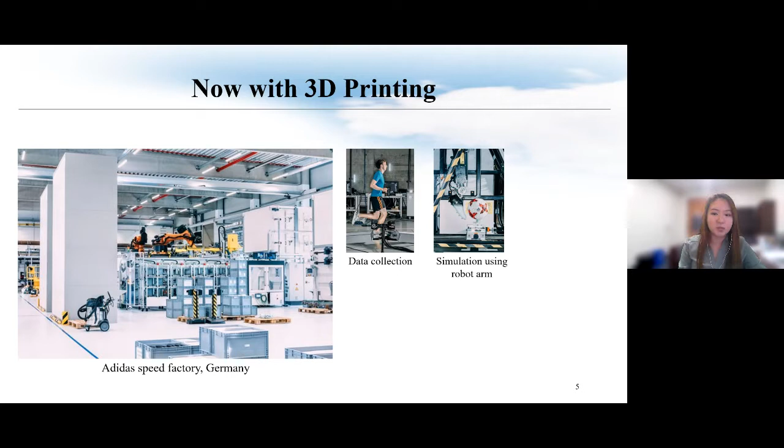For example, if you are a professional soccer player, they can use a robot arm to simulate the movement of kicking a soccer ball and see if the shoes can take the kick but also protect your foot. They can also run simulations in different environments, cold or hot, to customize shoes and shoe insoles.

I know for a fact that Adidas subcontracts their shoe insole orders to some small 3D printing companies like Carbon 3D. They also offer machine knitting and manual knitting to make sure you can achieve the functionality you're looking for, and also the shoes look nice.

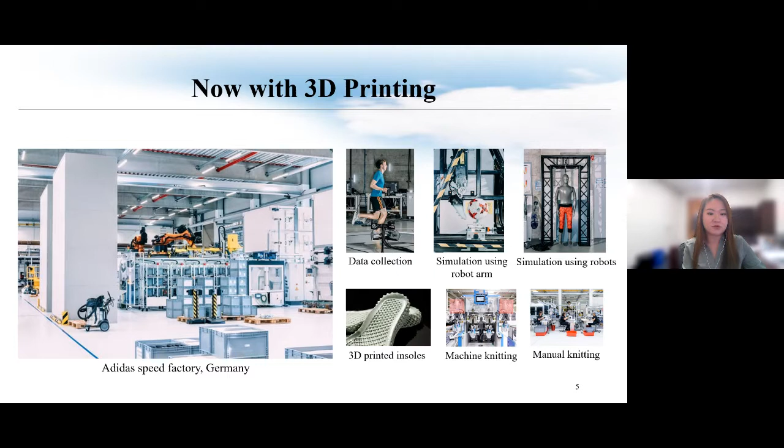So with 3D printing providing a high level of customization, we now have an entirely new option for buying a pair of shoes. Now the next question is, how do we build a house?

I actually just bought my first house a couple months ago. It's a new construction, well, it's still dirt, they haven't started anything yet. I wouldn't say I'm an expert, but I've been starting to get to know a little bit more about building a house.

So traditionally, to build a house, you need to buy the land, and then get all the electricity and water in. You need to design the floor plan, build the foundation, framing, all the major systems, and of course do the interior and exterior finishes. This whole process usually takes a couple months to a year, depending on the availability of raw materials or labor.

So now with 3D printing, how are people building houses? In Mexico, a 2-bedroom new house was 3D printed in about 24 hours, built for low-income residents. And in Italy, a small house was 3D printed in about a couple of days, using mud and waste byproducts.

Now let's look at Texas. This is in Austin, Texas. The local developer and a construction technology company 3D printed this house in a few hours. They used concrete that's designed to cope with extreme weather. This house was for people who were formerly homeless.

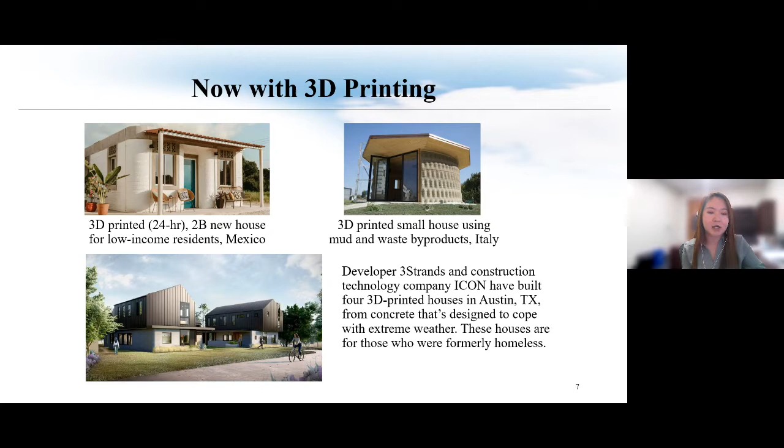Customizing shoes and building houses using 3D printing in a few hours - these are just two examples of how 3D printing is changing our lives. 3D printing, or additive manufacturing, is a process of joining materials layer by layer to make 3D objects, as opposed to traditional subtractive manufacturing.

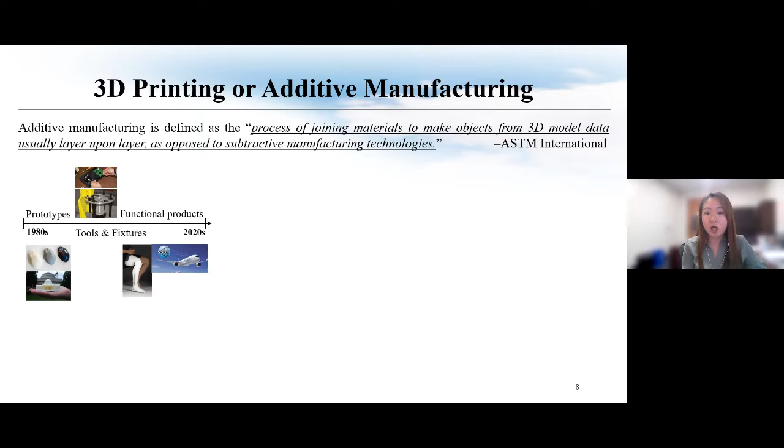3D printing was invented back in the 1980s for making prototypes. Later on, with advancements in new materials, new control algorithms, and new technologies, 3D printing has been used to fabricate tools, fixtures, and now functional products. The global 3D printing market has been rapidly increasing, leading to applications in a wide range of domains, such as aerospace, automobile, and medical devices.

A lot of companies have been expanding their service to 3D printing, like Amazon, Home Depot, and Autodesk. And there are some new 3D printing companies emerging as well, like 3D Systems and Stratasys.

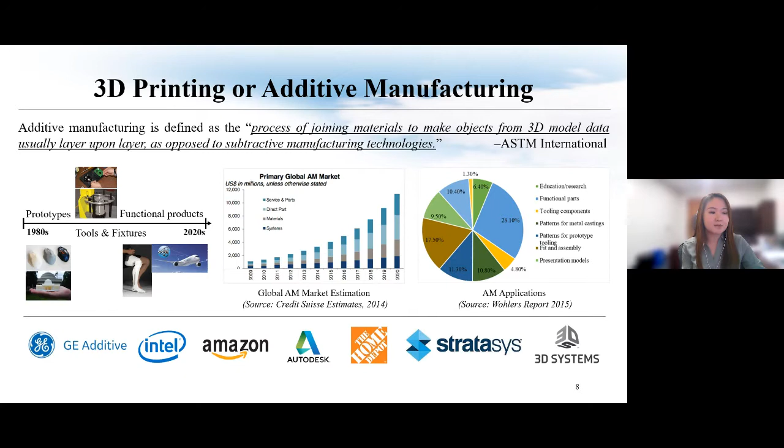At UTA, we have a wide range of different 3D printers. For example, at Dr. Ameri's lab, they have a laser powder bed fusion printer that uses metal powders. At my Sigma lab, we have a selective laser sintering printer that prints nylon, and we have stereolithography that deals with photosensitive liquid resin. We also have a dual nozzle material extrusion printer that prints thermoplastics like ABS or PLA.

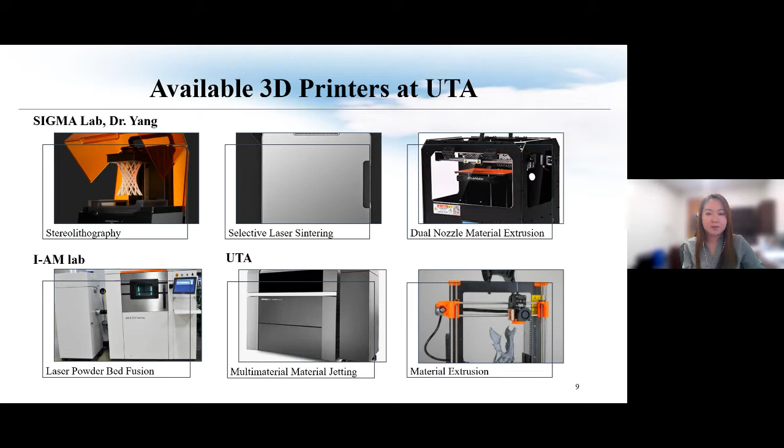Today in this talk, Dr. Ameri and I will be focusing on two research topics. The first will be on smart materials. Dr. Ameri will start by talking about how to fabricate smart materials using an inexpensive approach, and then I'll focus on green manufacturing—we're going to explore if 3D printing is actually environmentally friendly.

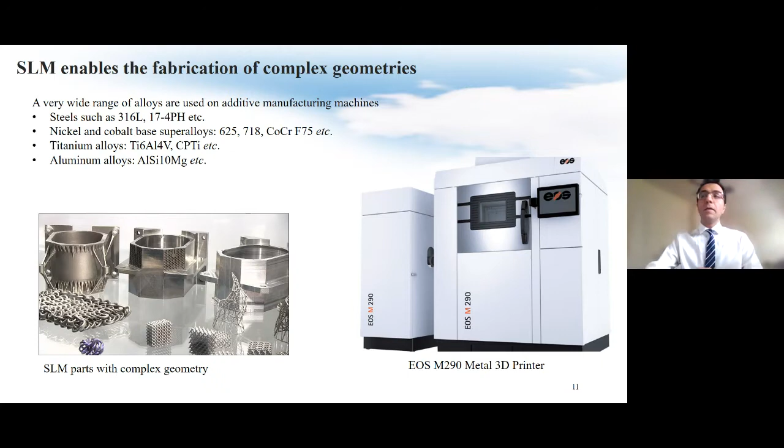Now I want to talk about other materials that are of great interest, but whose process parameters for additive manufacturing haven't been optimized yet for high-end applications. To name a few, these include nickel titanium or nitinol-based shape memory alloys, refractory metals, magnesium-based alloys, and composites.

Before talking about the procedure of process parameter optimization in additive manufacturing for a specific alloy, I'd like to briefly discuss the SLM technique in general. First, an ingot of the desired alloy needs to be gas atomized to produce powder. Then the CAD file of the component is segmented into layers, with appropriate process parameters assigned to each layer. The next step is the SLM fabrication procedure.

During fabrication, a layer of powder alloy is deposited, followed by selective laser melting based on the defined CAD geometry. Once melting and solidification of the layer are done, the building platform drops down by the thickness of the layer. This is repeated until the entire part is fabricated. Finally, the part has to be separated from the base plate either by removing supports or using an EDM cutter.

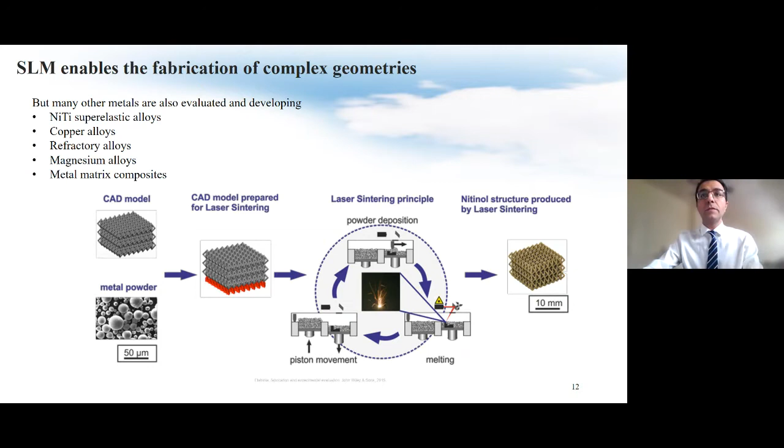One major challenge with optimizing processing parameters for additive manufacturing nitinol is ensuring the material shows superelasticity right after fabrication, without requiring heat treatment or post-processing. Before this work I'm about to discuss, the highest achieved superelasticity in the literature for an as-fabricated part was only 2%.

Very close to the stainless steel.

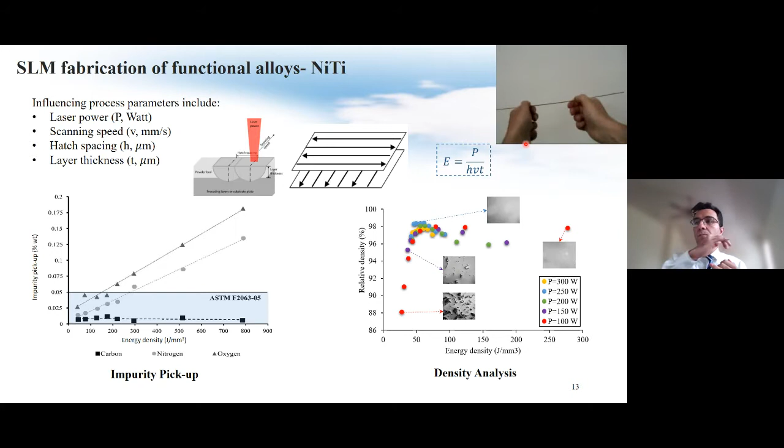Let me talk about the most important parameters in the optimization that have to be tuned during the procedure. For additive manufacturing or SLM, these include laser power, which is the power of the laser; scanning speed, the speed of the laser beam travel during fabrication; hatch spacing, the distance between neighboring laser tracks; and layer thickness.

There is a well-known term that relates these process parameters, called energy input. Energy input is equal to the power divided by the scan speed, hatch space, and layer thickness. The very first step in optimizing process parameters is looking at impurity pickup, density, and surface quality of the fabricated part.

We observe, as you can see here in this graph, higher density with higher energy input, which was desirable, but also higher impurity pickup, which was undesirable.

Per the ASTM standard, we selected a range for the process parameters that met the requirement of high density, allowable impurity pickup based on the rules or standard for biomedical application, and good surface quality—all desirable for biomedical application.

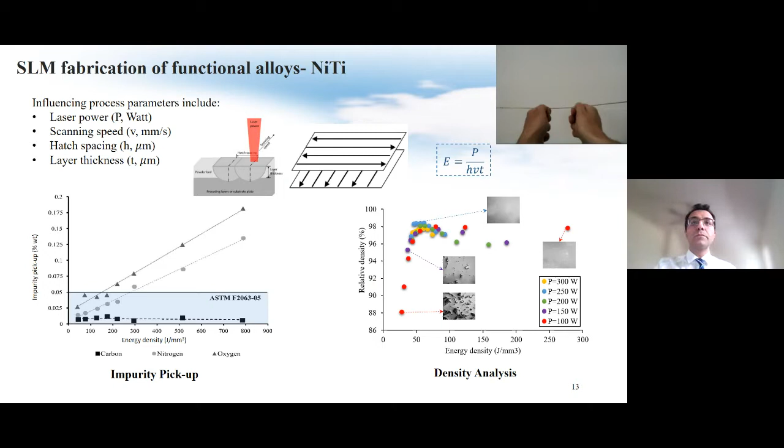The next step was to further narrow down the parameters to ensure the as-fabricated part demonstrates superelasticity. It is well known that superelasticity can be achieved through modification in the microstructure and texture of the fabricated part. In regard to the microstructure, it has to provide epitaxial growth, meaning an appropriate level of remelting between each layer.

As you can see here, if the energy is not enough for the fabrication, the layer would not be connected to the previous layer. On the other hand, if the energy is too much or excessive, there would be overheating, which intensifies residual stresses and causes significant grain growth—both undesirable in general.

In regard to the texture, it is well known that the presence of 001 texture can significantly improve the superelasticity when compared with a polycrystalline structure.

As you can see in this figure, the level of strain recovery is about 5% for single crystal conventional material, while it is only 3% for the same material but in the polycrystalline mode for the conventionally fabricated nickel titanium.

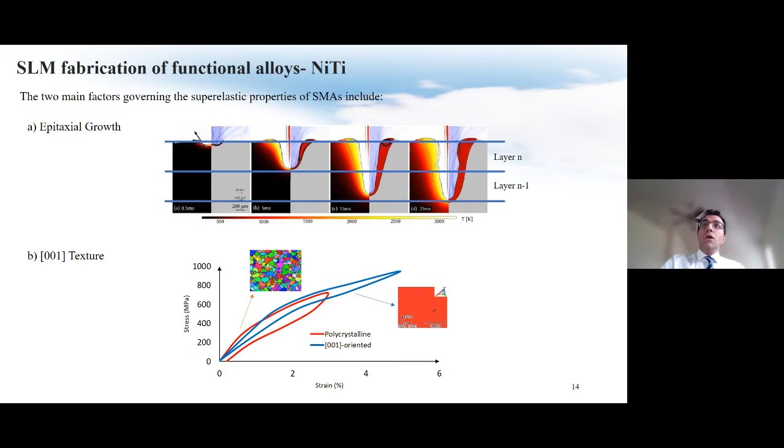Therefore, we performed a design of experiment and tried to achieve a set of parameters that result in epitaxial growth as well as 001 texture.

After SEM and EBSD analysis of all specimens, we were able to obtain a set of parameters that result in epitaxial growth and produce single crystal. The hypothesis here was that such microstructure and texture result in perfect superelasticity. Therefore, the next step was to test this hypothesis.

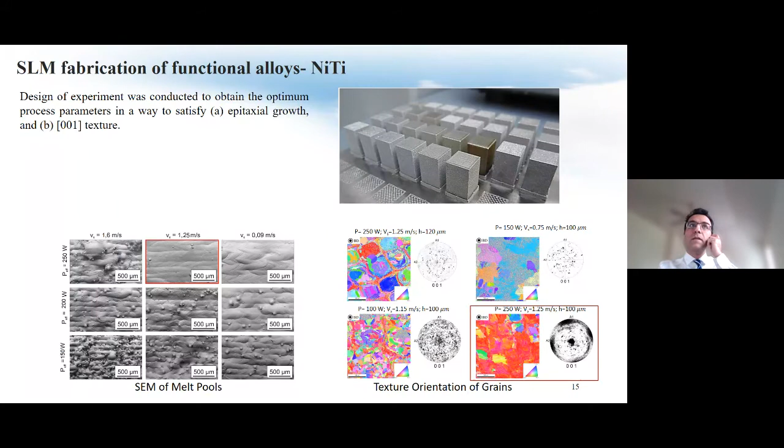During loading and unloading of the part, interestingly, for the first time, 6.5% superelasticity was achieved in this specimen without any kind of post-processing heat treatment.

On the other hand, the as-fabricated SLM NiTi samples in the literature demonstrate almost no superelasticity, and that is why the standard of care is to perform post-processing heat treatment on the as-fabricated samples, to create a desirable level of superelasticity as well as enhance the strength of the material by inducing more Ni-rich precipitate.

Anyway, post-process heat treatment should be avoided as it involves extra time, costs, as well as labor training, and some other associated costs. By the way, even with post-process heat treatment, the highest achieved superelasticity in the literature was only 4.3%, which is absolutely lower than what was seen in our newly optimized specimen.

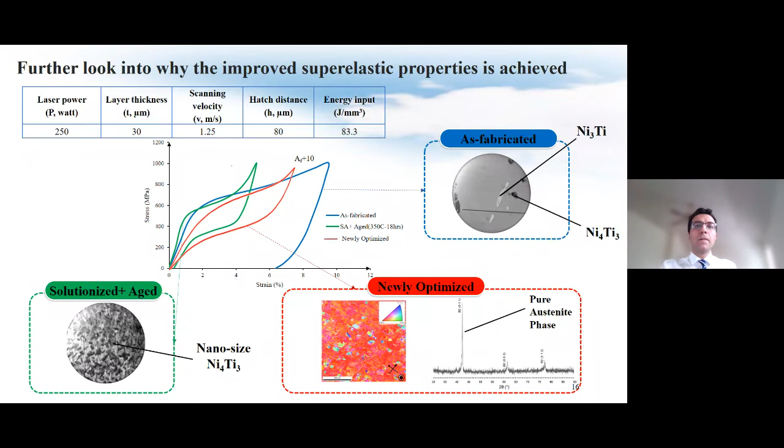I should mention that this major issue or drawback is not only associated with SLM-fabricated nitinol, but also observed in all fabricated specimens with different materials. Therefore, we started to identify the roots for early failure in tensile testing specifically, and provide some solutions to address this issue.

Our first hypothesis was that the layer-based feature of SLM specimens results in such early failure. Therefore, we decided to study the influence of building orientation and scan strategy, with the aim of minimizing the adverse influence of layer-wise fabrication.

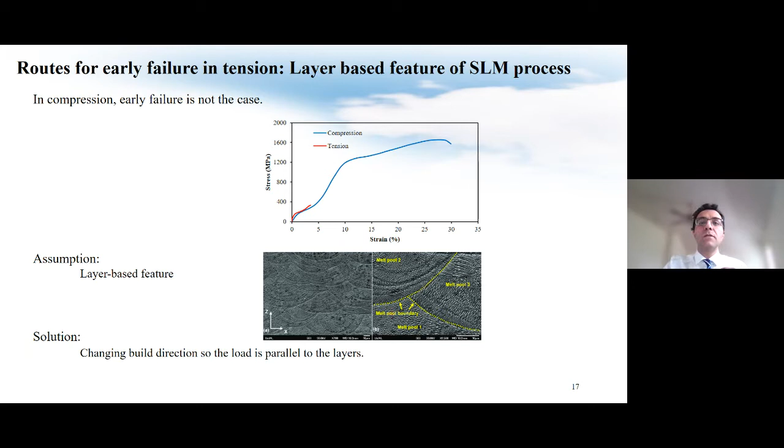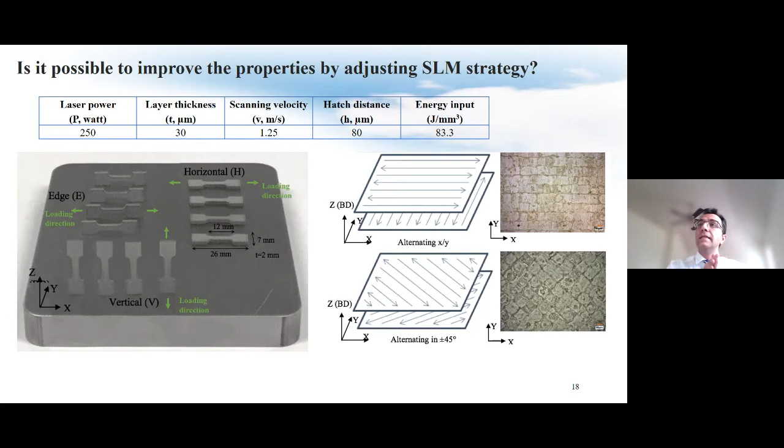As can be seen in this slide, the part processed horizontally with a scan strategy of alternating 0-90 degrees resulted in the highest mechanical strength. By the way, we found that the influence of the building direction, horizontal or vertical, was significantly higher than that of scanning strategy.

For the specimen built vertically, when we look at the SEM image at the failure, we observe that the type of failure was interlayer failure. On the other hand, in the case of the horizontally fabricated specimen, such failure was not observed, and that is why higher strength was observed.

Although relatively higher strength was achieved, there was still room for improvement, and we decided to further investigate the microstructure and find other routes for early failure.

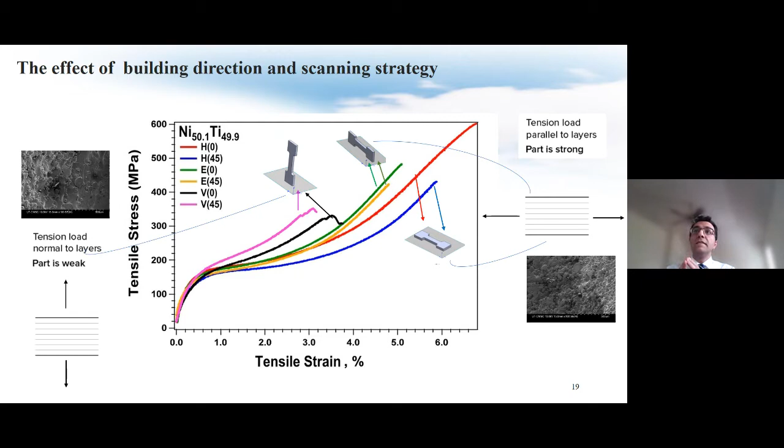Therefore, we decided to do a comprehensive study to evaluate the spatial microstructure properties of the SLM fabricated NiTi specimens. Before this study, all the available works in the literature were limited to local microstructure analysis rather than spatial analysis.

We observe significant variation in the microstructure of the specimen when comparing the area near the surface and the area away from the surface. For example, for the area away from the surface, we observe large epitaxial grain, elongated melt pool, and formation of minor brittle phases as well.

However, when looking into the area near the surface, we observe refined grain, interconnected melt pools, a significant number of brittle precipitates, as well as unmelted powder together with cracks, as you can see here.

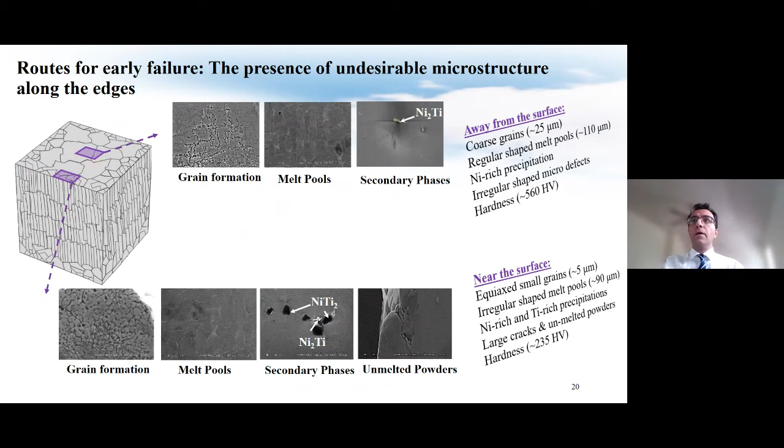Here we perform further analysis on the composition and hardness across the cross-section of specimen 2, and we confirm that brittle precipitates are higher near the surface. Also, as expected, we observe lower hardness value for the area near the surface compared to the middle region.

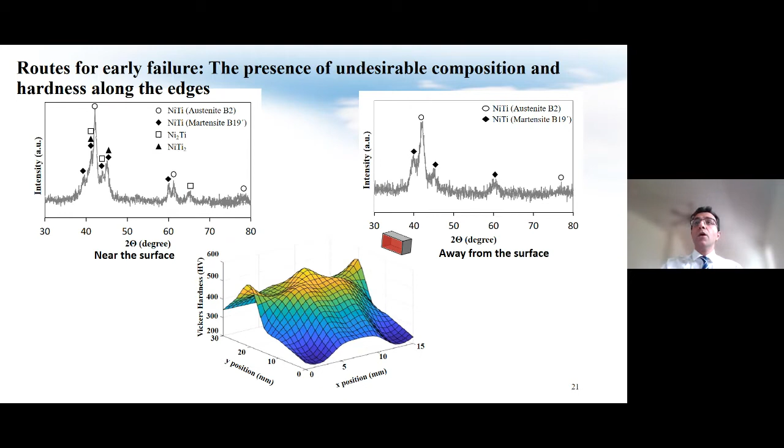Our hypothesis was that the area near the surface undergoes additional convection mode, and that is why the cooling rate at the surface area is higher.

In other words, the input energy delivered to the area near the surface is lower than the middle region, as shown in this picture as well. And that is why we see more cracks, unmelted powder, irregular melt pools, and maybe refined grains.

As a potential solution, we decided to consider a border with an offset from the main part during the fabrication for this study. Our aim was to control the convection heat transfer occurring near the surface area, by considering this border as presented here.

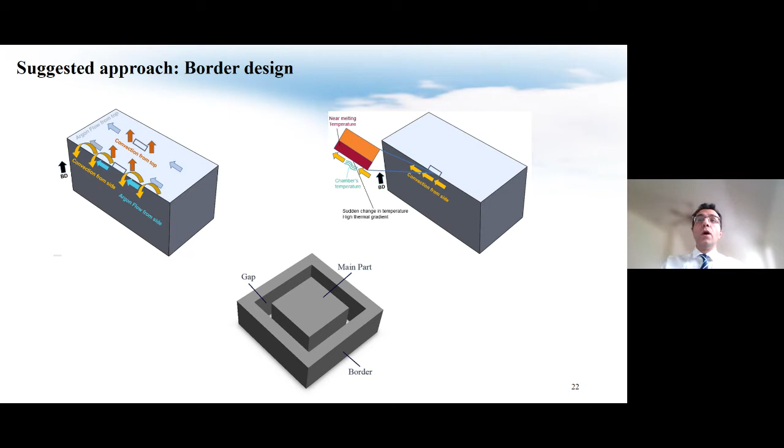Our preliminary results demonstrated that adding a border with a gap of about 0.5 millimeter significantly controlled the microstructure variation in SLM fabricated nitinol parts. For example, the sample processed with a border demonstrated larger, more equiaxed grain and more intense melt pools.

The future direction on this topic is to further optimize the gap between the border and the main parts, and perform mechanical and fatigue tests to obtain the level of improvement in the mechanical strength of as-fabricated superelastic nitinol.

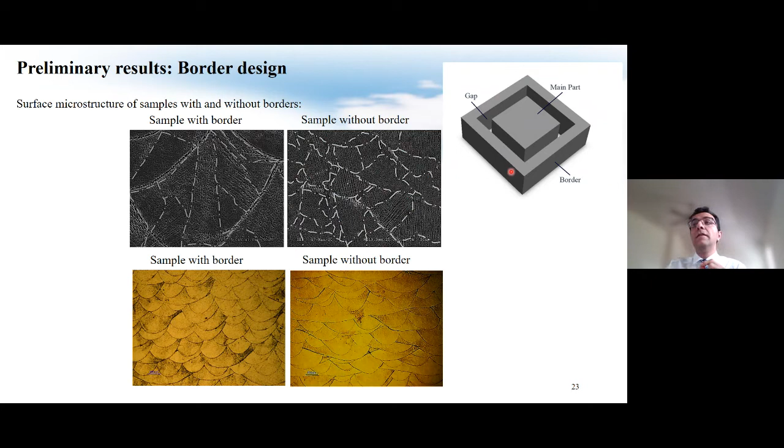The result of this study will definitely open new doors for the design and fabrication of high-strength SLM components, which would revolutionize the field of additive manufacturing of SMA, or shape memory alloys.

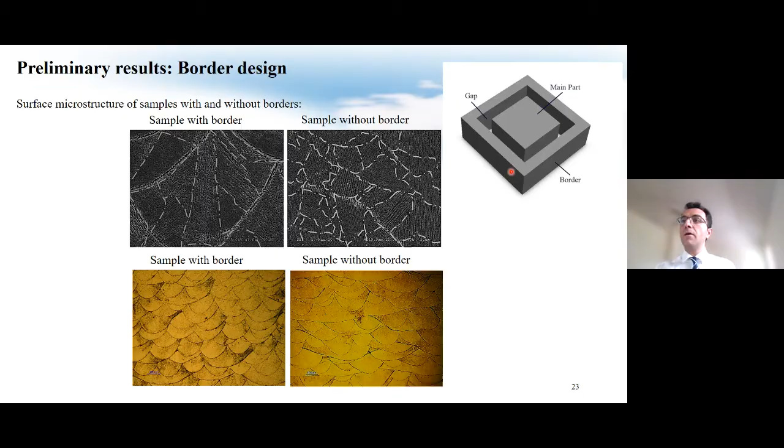Thank you, Dr. Mary. I think shape memory alloys are very interesting. So the second part of this talk, we're going to focus on the sustainability of 3D printing, focusing on environmental, economic, and social aspects of sustainability.

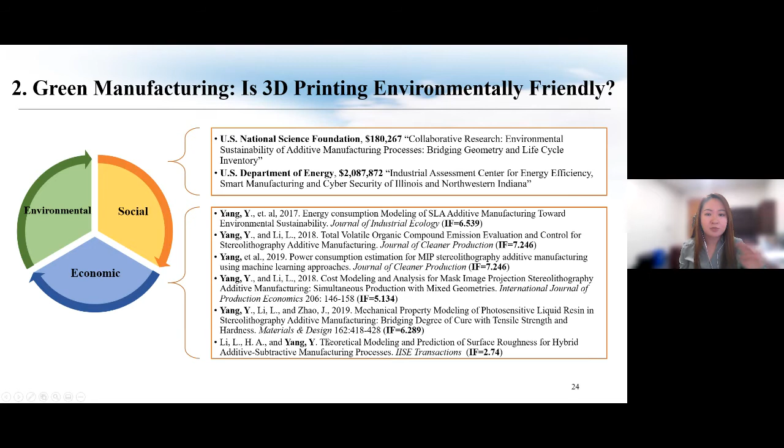This was previously sponsored by the National Science Foundation and the Department of Energy. We published more than 8 journal papers and some conference papers, but today, because of limited time, I will only share with you some part of this project and some interesting results.

So first, let's look at the process we're going to focus on and why. This process is called stereolithography. It's a mouthful. I have been using this terminology for more than 6 years, and I still have trouble pronouncing it. Anyway, let's call it SLA, or some people call it the SL process.

With this process, we deal with photosensitive liquid resin, like the yellow colored liquid there. That's our raw material.

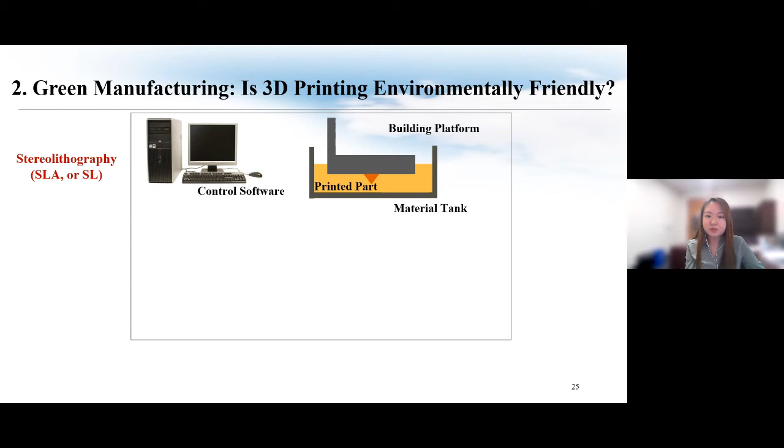So we are going to actually build solid parts from that liquid using this technology. We have a control computer, and we set up the printing by selecting values of some controllable parameters. We send that information to the components of the machine. We use the projector to project the images of each layer to the build platform, and we solidify that layer with UV light. Then we repeat this process layer by layer until we finish the entire production of the part.

So why do we choose this process to evaluate sustainability? Well, first, because it has multiple electricity consumers, and we have some parameters associated with them that we can control. That gives us the opportunity to change the energy consumption.

Second, the raw material we use here, this photosensitive liquid resin, is VOC coated. What that means is, even without 3D printing, that resin can possibly have VOC emissions. VOC stands for volatile organic compound, and that's not good for human health. So it's very important to understand how much VOC emission is caused by 3D printing and what we can do to improve the process to reduce or even eliminate the potential human health risks.

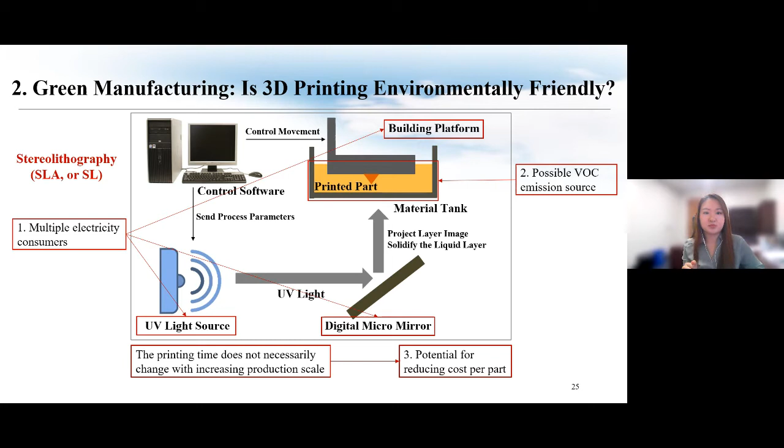Last but not least, one unique thing about this projection-based SLA process is that the printing time does not necessarily change with increasing number of parts. Meaning you might have the same printing time when you print one part versus when you print three of the same parts. So that indicates great potential for reducing cost per part. Basically, that's why we decided to focus on this process for sustainability evaluation and for exploring opportunities to enhance the sustainability of 3D printing.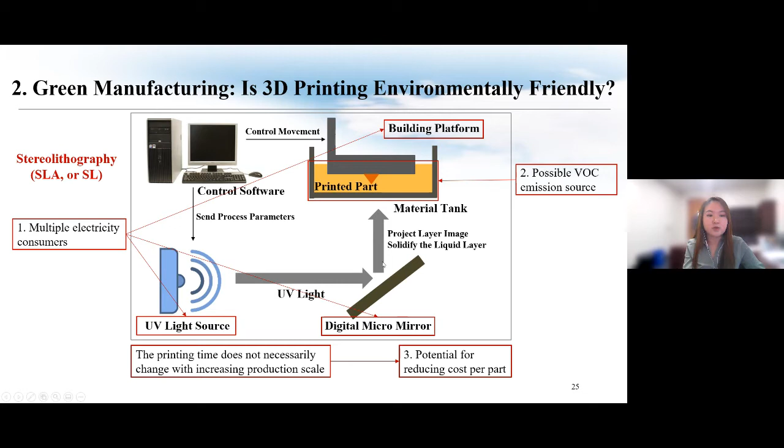So first, we decided to look at energy consumption. This part is very preliminary work. Basically, what we did is build a mathematical model to estimate the energy consumption, and then we validated that model by comparing the calculated results with experimentally measured results. The prediction error of our model turned out to be less than 12%, which is possibly caused by the low level of accuracy of our power meter.

Back then, I used a normal power meter and had to manually write down the readings, so that can cause some inaccuracies. But later on, in another energy consumption study, we actually used a more advanced power meter which has an automatic data logging function, so that actually increased the accuracy.

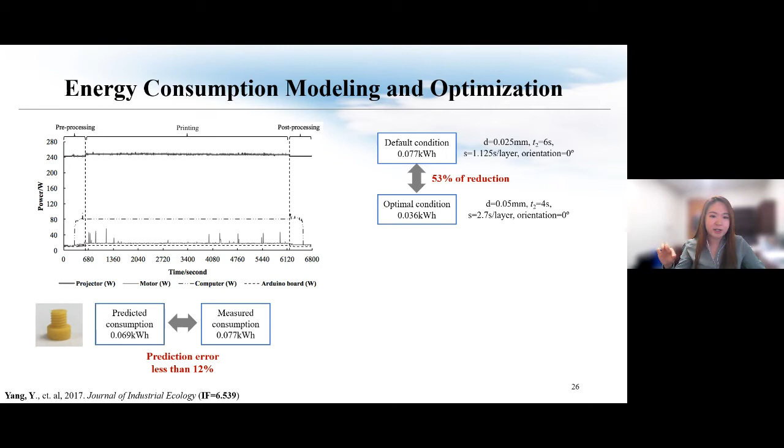Based on this model, we performed optimization, and the result suggests that we can potentially reduce the energy consumption by around 50% by changing the values of these parameters. I mean, this is a no-brainer, because if you change the height of each layer, you change the total printing time, so of course you're going to end up with different energy consumption, right?

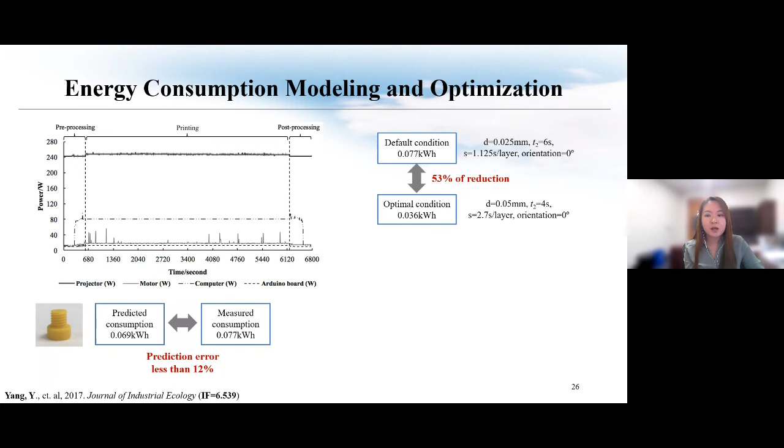But the tricky thing here is how to make sure we still have good fabrication quality, because in my opinion, any attempts to reduce energy, reduce cost, or reduce emission without considering quality is meaningless. So we also looked at the quality of parts fabricated with optimized parameters. We actually found out that using the optimal parameters, we didn't sacrifice the surface quality.

But the thing is, this is purely experimental. We didn't have the capability of actually estimating or predicting the fabrication quality. We were actually able to do that later—I'm going to talk about that in a few minutes. So this is energy consumption.

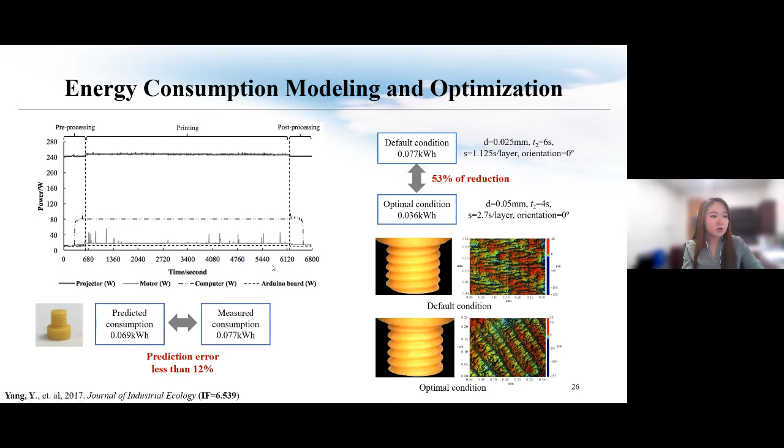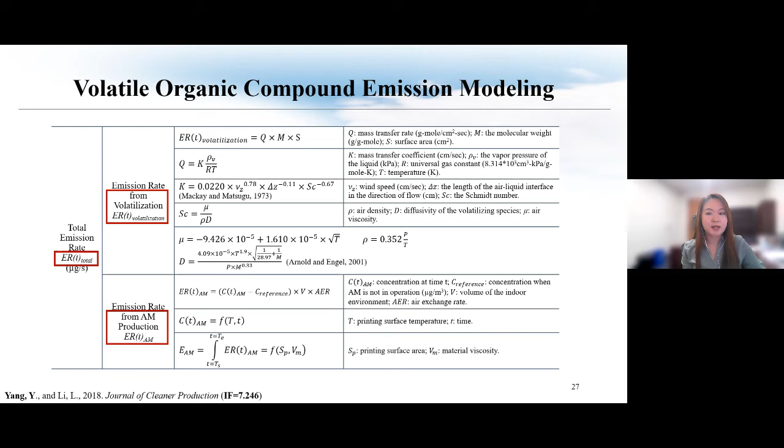Next, we looked at the VOC emission. What we did is build a mathematical model. In this model, we have two emission sources. One is the emission due to volatilization, meaning even when you don't 3D print, just having that raw material sitting in your lab causes VOC to escape. The second part is VOC actually caused by 3D printing—for example, during printing the build platform moves in and out of the material tank, and that disturbance facilitates volatilization. Also, during printing the temperature increases, which can cause additional emission as well.

So we validated this model through experiments using a real-time VOC monitor. We did multiple experiments for different materials and different production scales to validate our model, and the model turned out to have around 14% error.

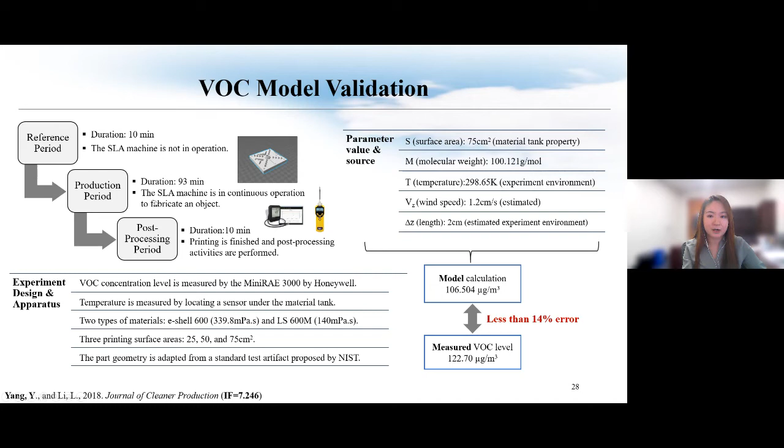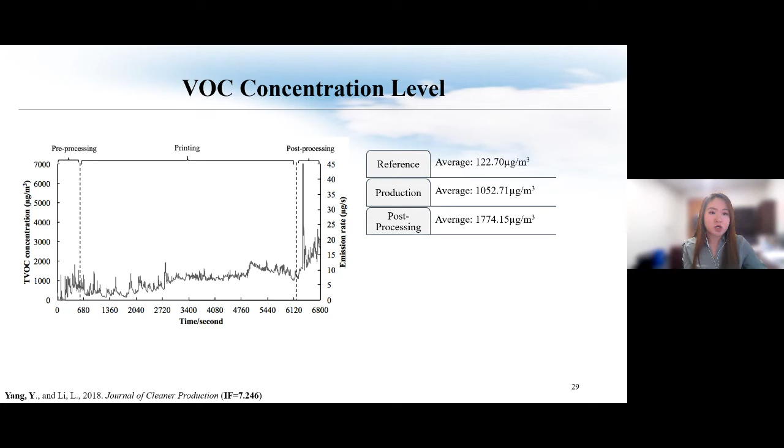So next, we are interested to see if this level of emission will be harmful to people. The reason we are particularly interested in this is because this type of desktop small-sized 3D printer is often used in universities and high schools for educational purposes, and also in hospitals or medical facilities to fabricate small medical devices. Students and patients are all vulnerable groups.

So it's very important to make sure the emissions from these 3D printers will not cause any health concerns. After the evaluation, our results show there are no cancer-related risks, but there are definitely some non-cancer risks like skin irritation and lung problems. So the next step is: what can we do to reduce that emission and make the printer more environmentally friendly?

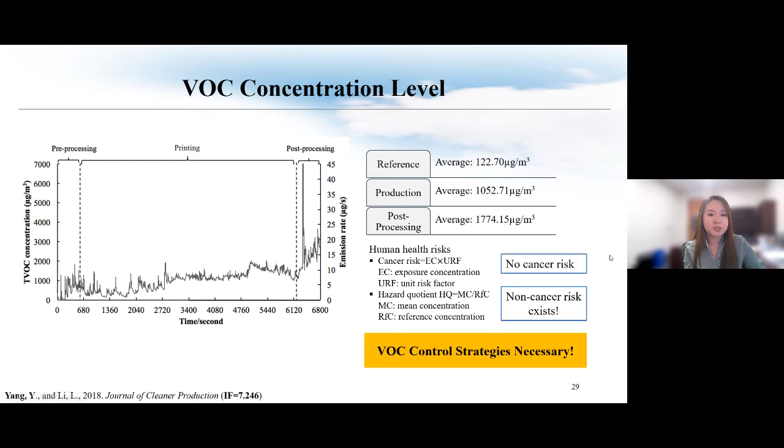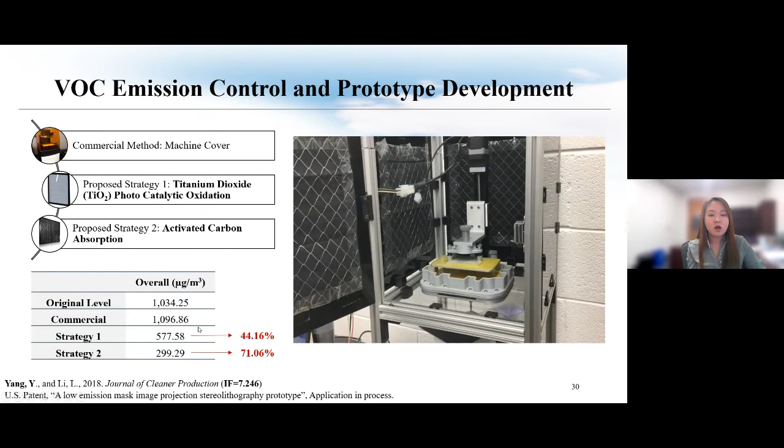The commercial method is just to add a machine cover, which has been proven to be not that effective. So we tested two methods: one is to use titanium dioxide to oxidize the VOCs, and the other is to use activated carbon to absorb the VOCs. Both methods turn out to have the ability to reduce emission levels by a significant amount. We actually built a prototype that used both of these strategies, and also adopted the optimized parameters we selected in the energy consumption study.

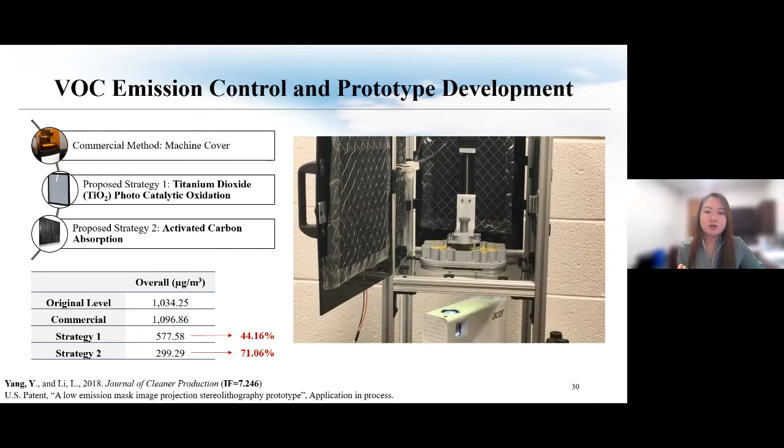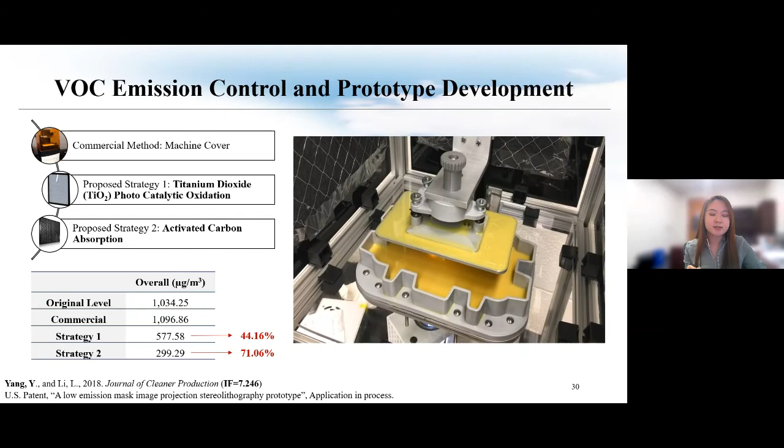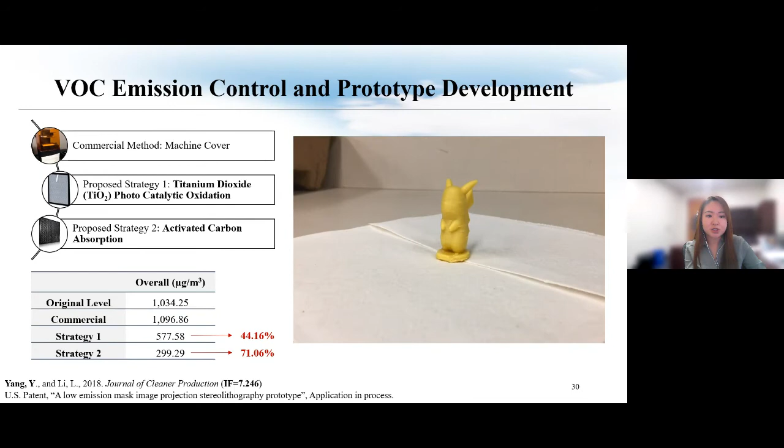Interesting news is that earlier last year, 2020, a company - I remember it's 3D Systems, but I'm not sure - had a new 3D printer. One of the features they mentioned was that the printer was equipped with VOC emission filters. So I definitely see that companies have been starting to care more about the potential emissions from 3D printers and what they can do to make them more environmentally friendly.

So that's energy consumption and process emission. Next, I would like to focus on how to reduce the cost per part.

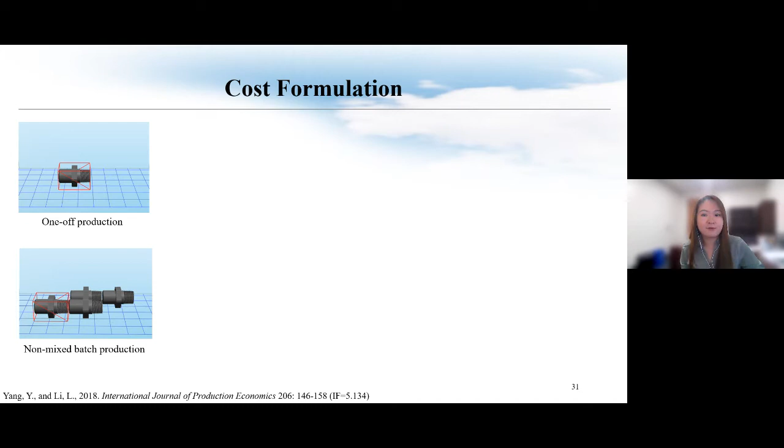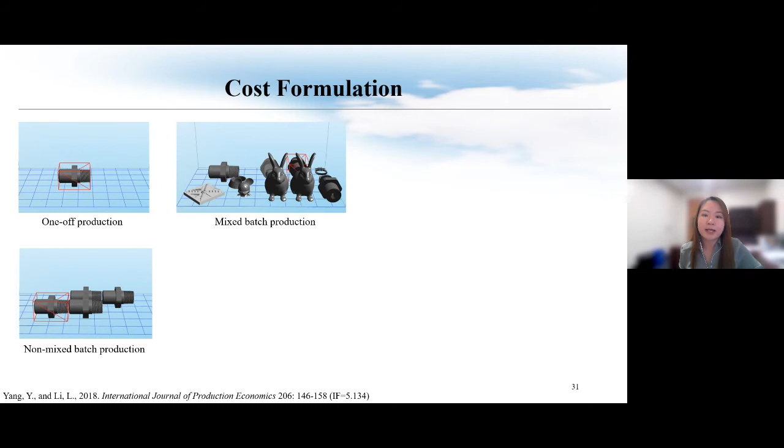Usually we have three different layouts for production: one-off production, where we just print one part each time; non-mixed production, where we have multiple parts but they all have the same geometry; and mixed production, where we have multiple parts with different geometries. Traditionally in literature, most people focus on one-off production or non-mixed batch production because it's easier to calculate their cost. So what we did here is build a cost model capable of quantifying cost for all three different layouts, and based on that, we formulated an optimization problem.

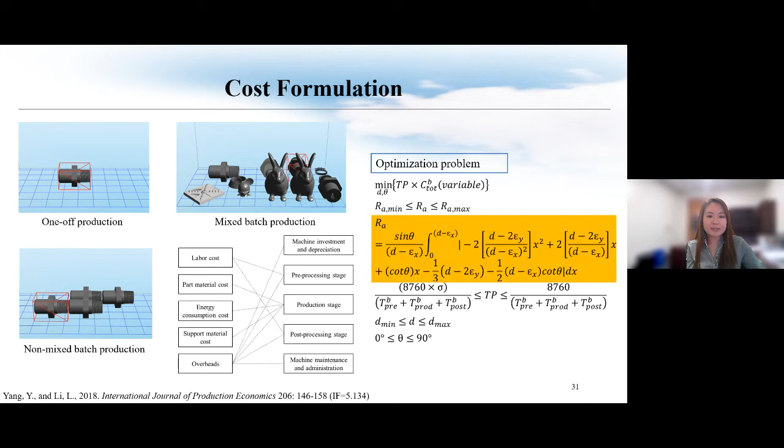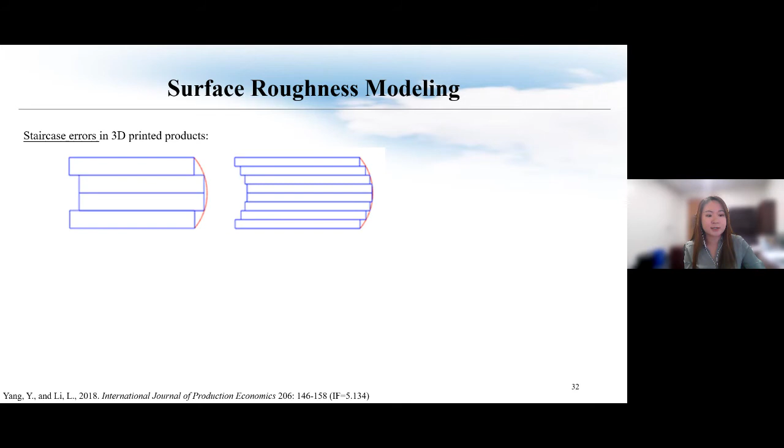We had to do a separate study focusing on surface roughness modeling. The way we modeled the surface roughness is based on staircase errors. If you print this part with 4 layers, you can see there are a lot of voids, and that's a significant defect. If you increase the number of layers, that defect becomes less significant, but you can still see the staircase errors. If you further increase the number of layers, the defects become less significant, but if you use a microscope, you can still see those staircase errors.

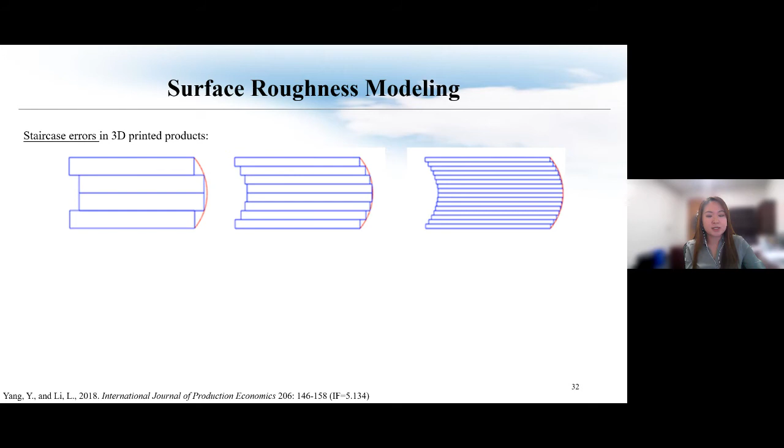So what we did here is use this surface profile to represent the actual staircase errors, and we were able to get the mathematical representation of this profile. Then we transformed the coordinate system back to the actual surface, and we were able to build a model for calculating the surface roughness.

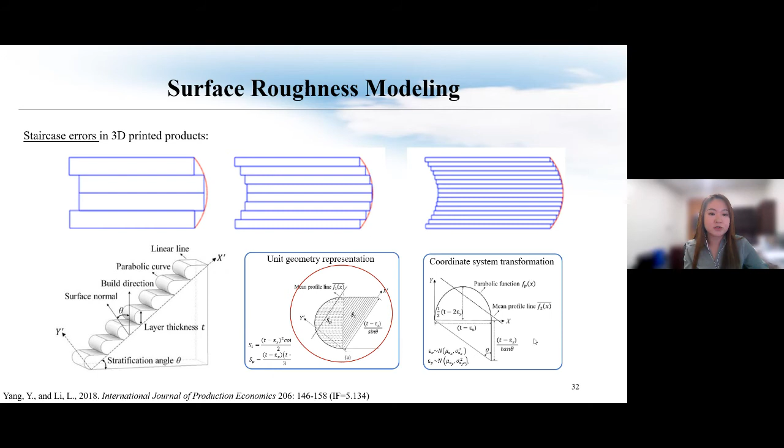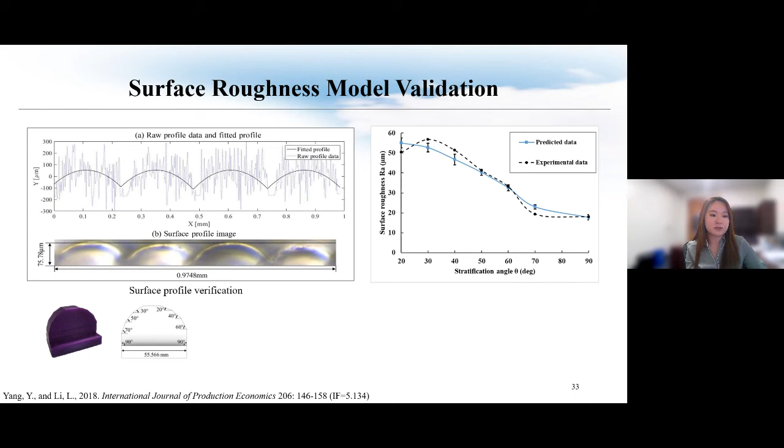We used a microscope to actually look at the surface profile, and we observed staircase errors. Then we used this geometry - it's unique because it has multiple surfaces with different angles, so we could validate our model for different angled surfaces. We also compared our results with literature, and our model turned out to have an accuracy of almost 96%.

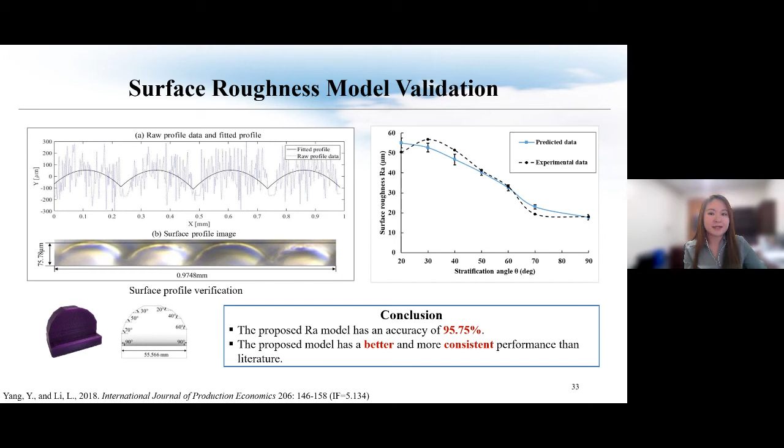So then we implement this surface roughness model back to the cost optimization problem as one of the constraints. As a case study, we compared 3 production scenarios. The first is non-mixed production with low machine capacity, meaning we use a very low portion of the build platform. The second is non-mixed production with high machine capacity. The third is mixed production. For all 3 production layouts, we made sure to achieve the same production yield, meaning we print the same number of parts.

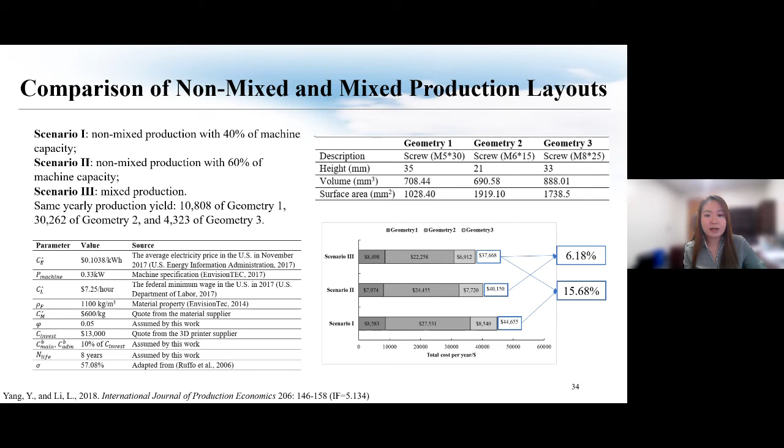With the mixed production, we were able to save yearly production cost from 6% to almost 16%. That means production cost can be reduced just by adjusting your production layouts.

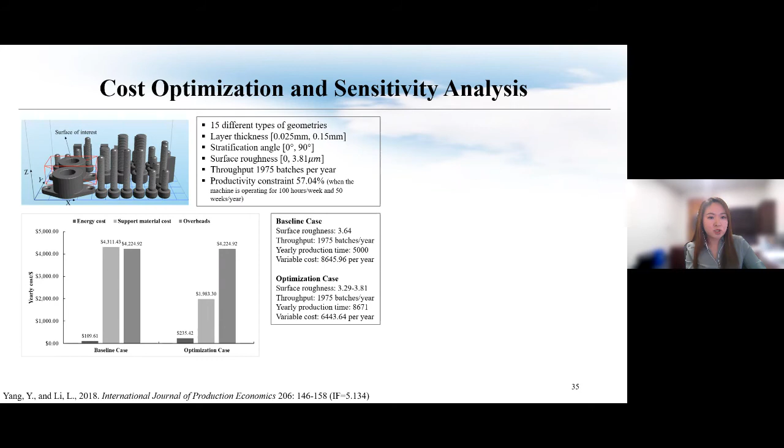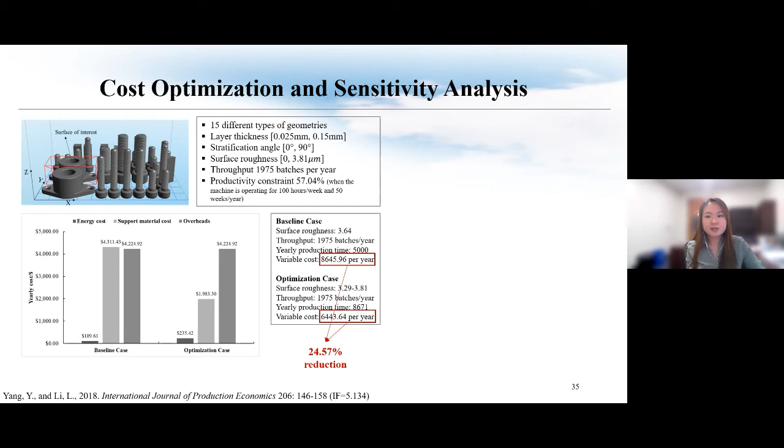That's really exciting news because it means there are opportunities here to save cost. Like before, you can change the production layout, and now you can change the values of parameters, and this model can make sure you still have the desired quality. We also performed sensitivity analysis, and found that the material unit price is the key cost driver affecting the optimized cost and the total yearly cost.

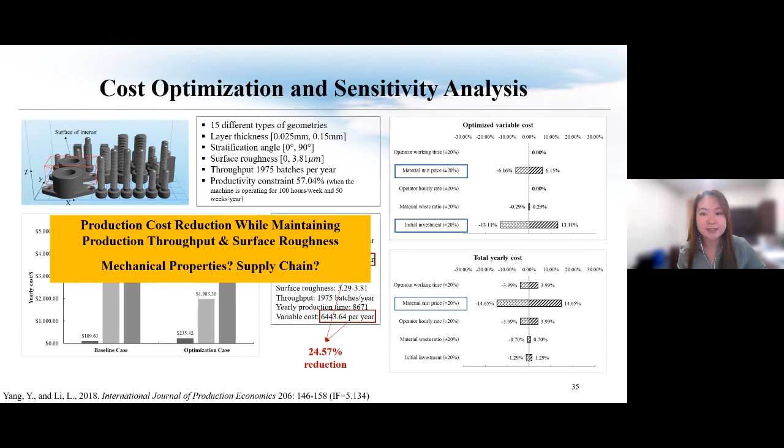The next question is, yes, we can reduce cost while maintaining quality and production, but what about mechanical property? What about when we actually use this technology in our supply chain? We did a lot more studies on these topics, but because of time I won't be able to share them. If you're interested, you can visit our website, Sigma Lab, to check out our publications and research studies.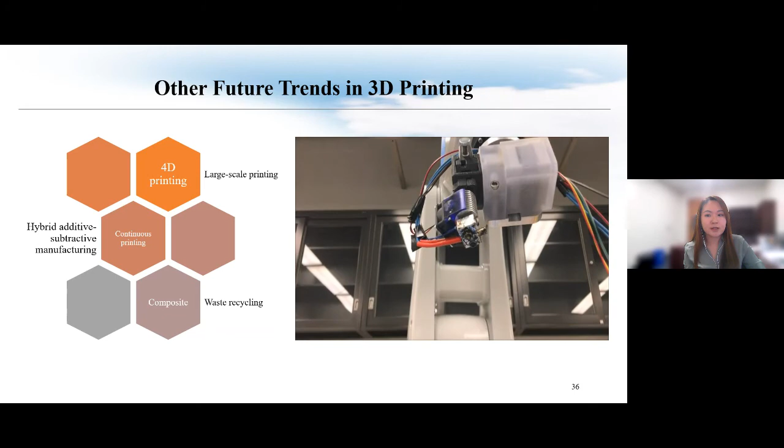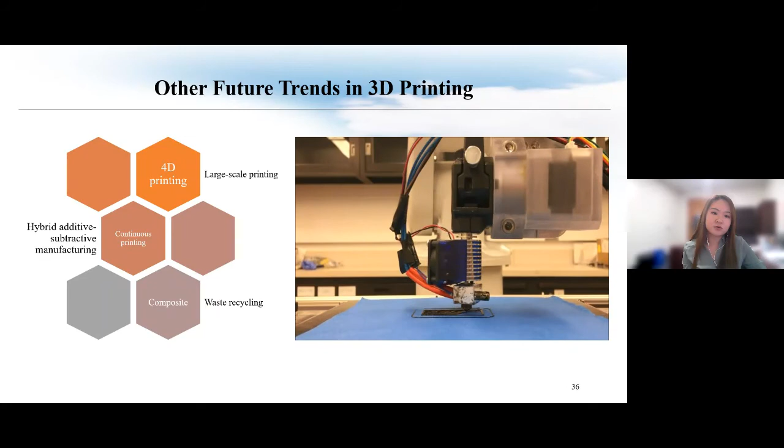Smart materials and green manufacturing are just two examples of many future research directions in 3D printing. There are many other directions like 4D printing, large-scale printing, continuous printing, composite printing, waste recycling, remanufacturing, repair, and hybrid manufacturing. This is from one of my previous projects on hybrid manufacturing, where we use a robot arm to integrate both additive tools and subtractive tools.